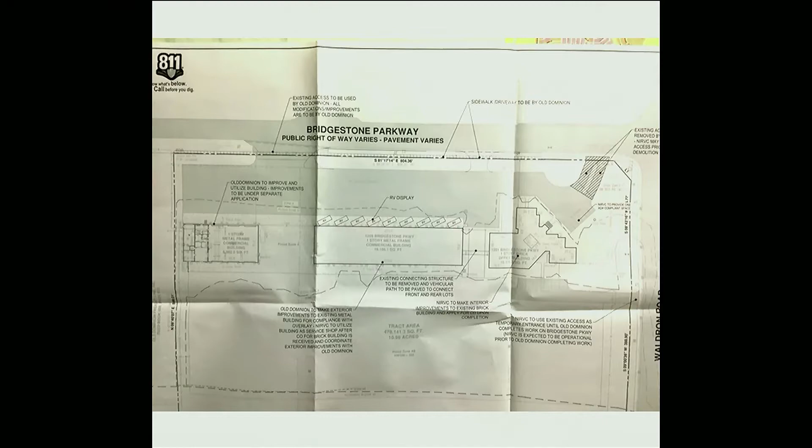have been addressed over the last 2 months, and the last remaining items were the architectural overlay requirements, because this is in the architectural overlay district for Waldron Road, covering the entire parcel. Last I heard from the applicant, they're letting the Old Dominion site plan essentially be in charge of changing the building and adding materials to make it compliant with the overlay. So this isn't a traditional submittal where you'd have 2 different applicants with 2 different material boards and 2 different color elevations. It's just whatever Old Dominion chooses that will be used for all 3 buildings on the site.

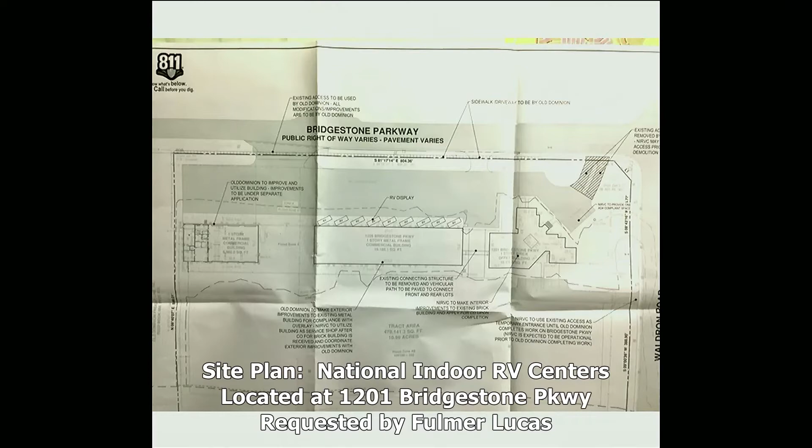Other than that, there were no outstanding technical items. We've covered the sidewalk in the past 2 months as well, and that sidewalk currently wraps the corner, but Old Dominion will be installing it all the way down Bridgestone for the entire frontage. Of course, the corner will be closed off, as you'll see here and later in the meeting. This access nearest to the corner of Waldron and Bridgestone is being closed off. Unless Mr. Leach has anything, I don't have anything else. That completes the report.

Thank you, Mr. Logan. Do we have any questions or comments from the board? Mr. Chairman, I do, just a question for staff.

The drawing we're looking at for National Indoor shows Fulmer Lucas, and the Old Dominion drawing is from another engineer, TTL. There are some minor differences. Is that something you can handle yourself? Yeah, they are different engineers that prepared it, so there are just some minor differences that'll be sorted out whenever they actually go through construction.

Thank you, sir. Any other questions or comments? Yes, I had one question regarding the entrance on Bridgestone Parkway - I think it was discussed as to whether that would be widened or not. I don't see the width here. On the Old Dominion submittal that you'll look at next, it shows being widened to 40 feet, which is what Alderman Coates had requested. Okay, perfect, thank you.

Any other questions? Mr. Chairman, I'll make a motion to accept as submitted. We have a motion to accept as submitted by Alderman Coates, seconded by Mayor Cole. All in favor say aye. Aye. All opposed? Motion passes.

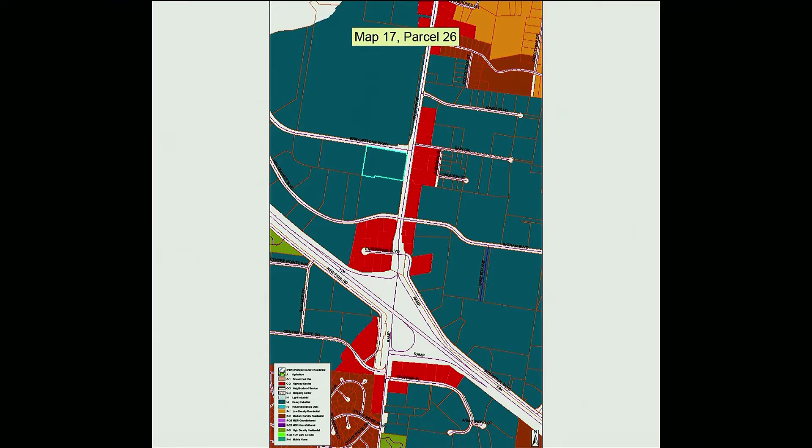You can see on the zoning map it's I-2, and really this whole area is I-2. And here's the latest plan for Old Dominion.

It covers both sides. This is the north side. So the shop is here, and they are adding a little under 3,000 square feet to this shop, and that's shown on the plans.

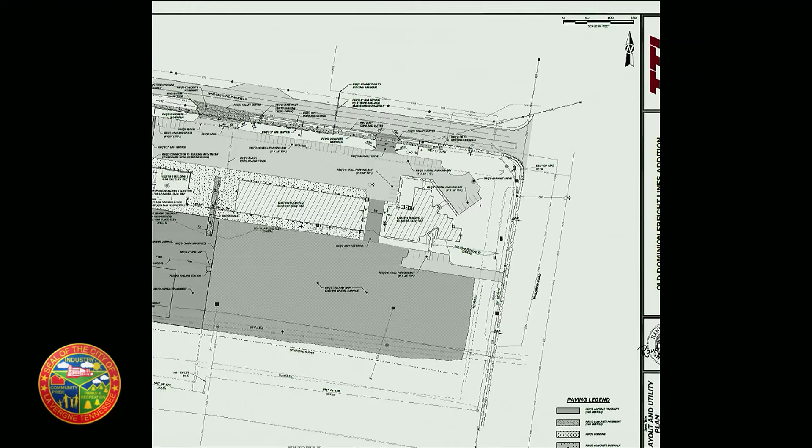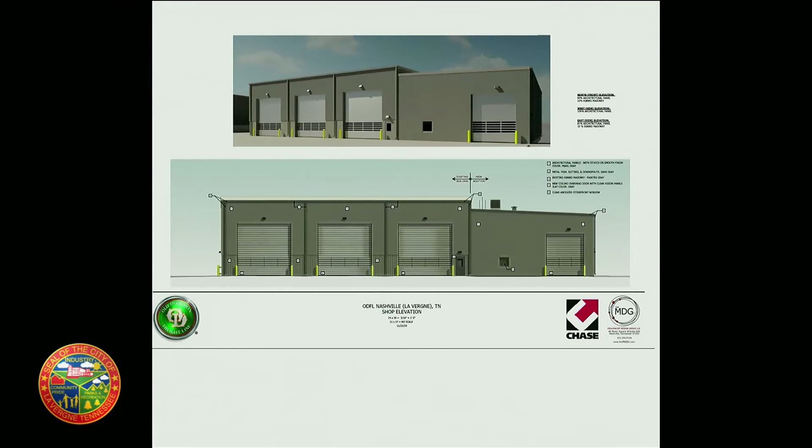And then the exterior elevations, you saw these at the workshop, and I couldn't see anything that has changed since the workshop for the exterior. They're proposing architectural panels to cover the building and the addition, covering the shop and the addition to the shop. And for the larger building, also known as the middle building, the same architectural panels on the outside.

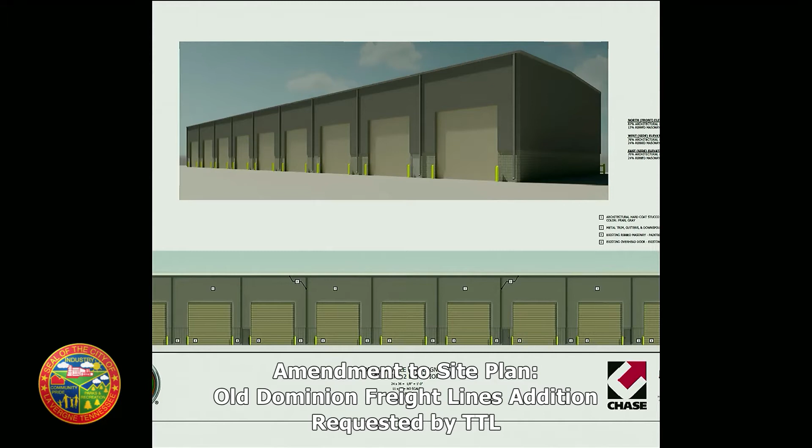They'll also be making some changes to the doors as well. These are also in your packet. They submitted full-size color elevations, which are in each packet, so you can see those up close.

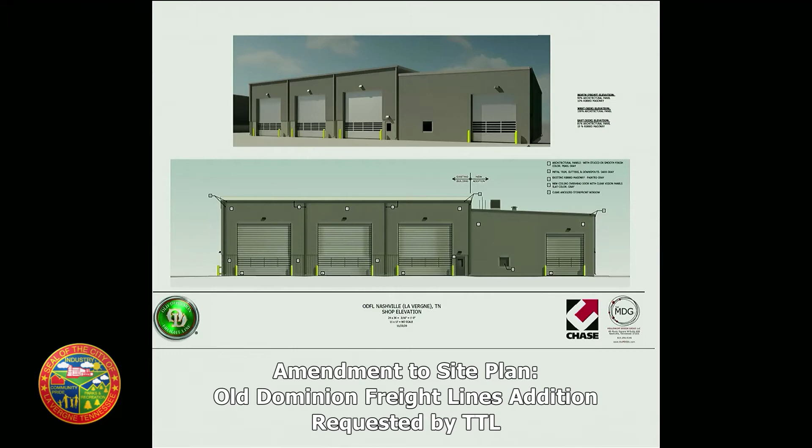They had a few items for Mr. Leach, but everything with planning had been taken care of, so I'll let Mr. Leach speak to those items. Thanks. Thank you, Mr. Logan. Mr. Leach, sir? All items have been corrected. There shouldn't be any in your list.

Any questions or comments from the board? Chairman, I just have one for staff again. With the addition to the building, it's taken over the 5,000 square feet. Is that a firewall that's going to be put in between the 2 buildings? They intend to sprinkle it, so the question of the firewall will actually come at the time of their building permit. My assumption would be, given that it is sprinkled and it's an industrial building, that it wouldn't necessarily have to have a firewall, since that's typically for a residential type structure.

Thank you, Mr. Chairman, I'll make a motion to accept as submitted. We have a motion to accept as submitted by Alderman Coates. We have a second by Mayor Cole. All in favor say aye. Aye. All opposed? Motion passes.

Next item. Site plan, DNA partnership, requested by Huddleston Steel, proposed parking lot on 2.03 acres, property located on Sand Hill Road, tax map 14, parcel 67.05, I-2 Light Industrial Zoning District, property owned by DNA Partnership LLC.

Mr. Logan. Thank you. So this is the site plan for Sand Hill Road. It's a 2-acre site on the south side of Sand Hill Road, and you can see it here in the image. The goal of this submittal is to make this a parking area, and there's no other buildings or structures planned at this time.

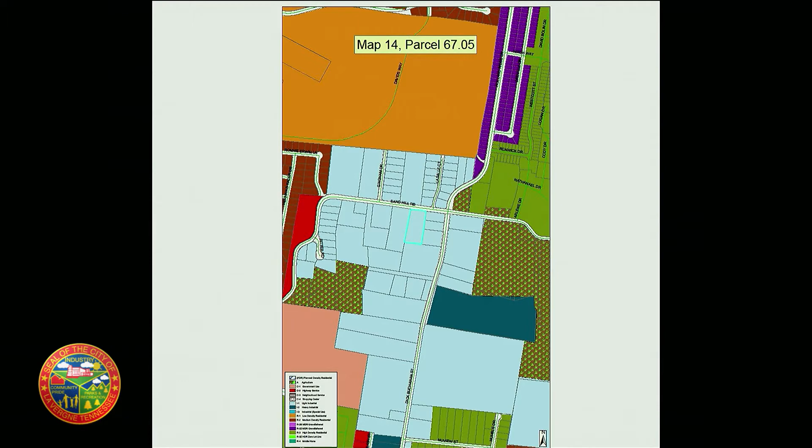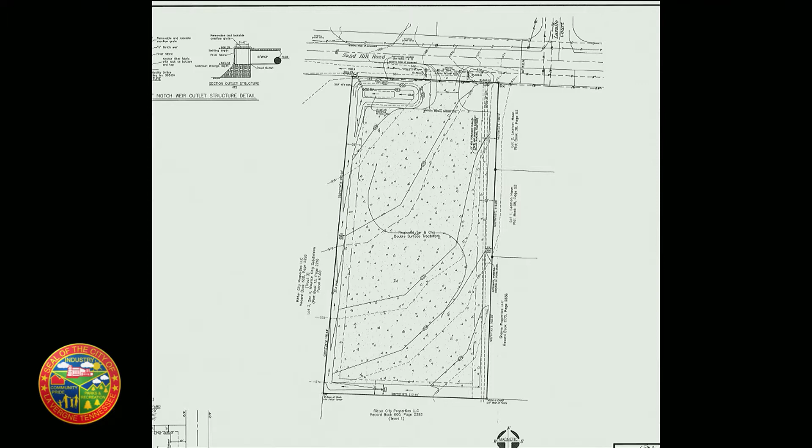But for this item, last month the entrance was discussed, and they had a 30-foot wide entrance, and then you can see in the new plan on the screen it's now a 40-foot wide entrance. They've also added a landscape plan, which was one of the comments from the workshop. So you'll see in your packet they've submitted the landscape plan, and the planting schedule is also shown right here, the plant materials schedule.

The applicant called me last Monday before Christmas, and we had a discussion about the dustless surface. They were asking about gravel, and I advised them that gravel would not be accepted by the city, so they've changed the plan to show all dustless surfaces.

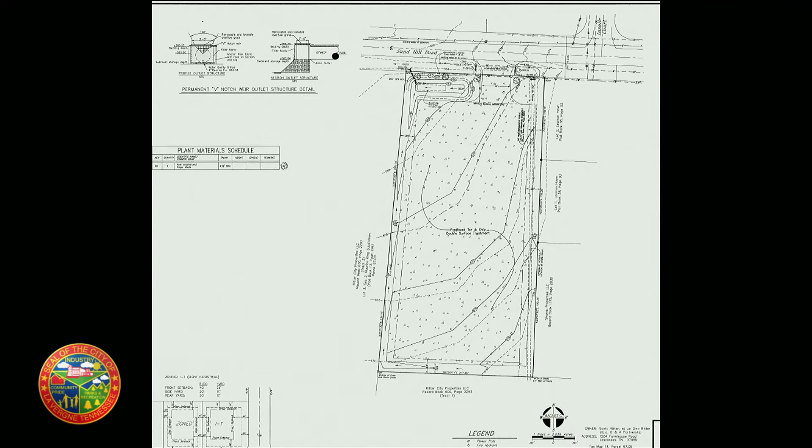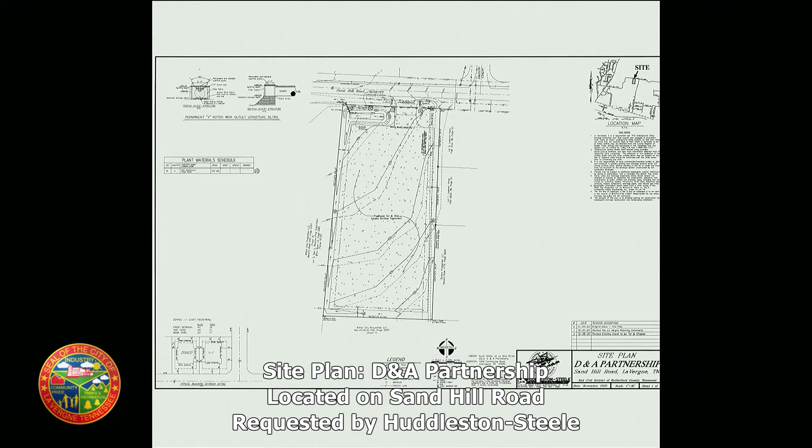The other note in the report, which I think I made in bold, is that they did add note number 7 to the site plan, saying they agree to pay the city $9,500 as the fee in lieu for sidewalks. I'm not sure how that was worked out, but that's what they added to the plan. I don't know if the board, that's part of your normal voting, so you can vote on that or vote to deny it, whichever y'all want to do. But I'll let Mr. Leach speak to that if he would like.

So if anybody has any questions, we'll be happy to answer those. Thank you, Mr. Logan. Mr. Leach, would you like to touch on the fee in lieu of sidewalks?

So with this being an industrial site, there's some provisions in the subdivision regulations regarding that. As to the requirement, sometimes we've required sidewalks to be put in, sometimes we've done fee in lieu. We've discussed that 5 or 6 different ways. The applicant requested that they be allowed to do the fee in lieu. I told them how to calculate it, they calculated it and put it in the notes. Basically, their request is to do the fee in lieu.

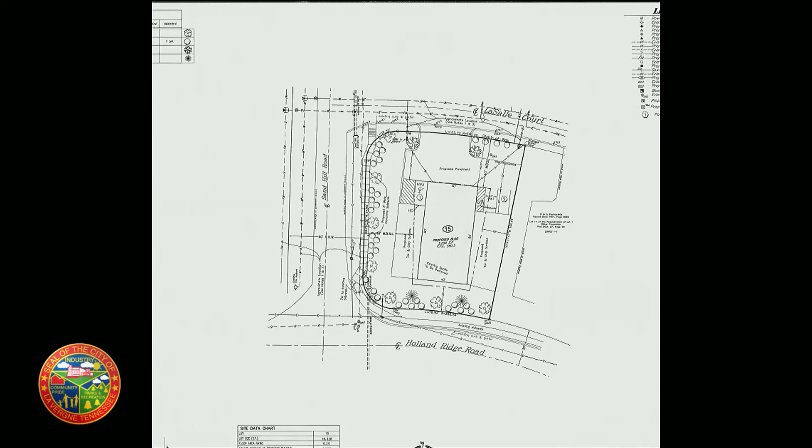It wraps around at the corner of LaSalle and Sand Hill, and they've changed that since the workshop, so that's been added. They've also added the landscape requirements, the landscape plan, since the workshop, and some site photos. This is how it looks this month.

LaSalle is a basic curb and gutter street, and it's had a lot of development in the last 3 or 4 years. We've been out there several times as each project gets completed. This warehouse that they're proposing will be about 3,200 square feet.

The site is a little over 16,000 square feet, 16,328. This is a one-story building, similar to all the others along LaSalle. They are proposing all dustless surfaces, and some areas of tar and chip will be located next to the new building, on the north and south sides.

We've already covered the sidewalks, and there weren't any other outstanding comments, so that completes the report. Thank you, Mr. Logan. Do we have any questions or comments in regards to this item?

Motion for approval as submitted. We have a motion for approval, second by Mayor Cole. Motion by Mr. Holliday. All in favor, say aye. All opposed? Motion passes. Thank you, sorry about that.

Next item, item number 6. Final plat, Old Dominion Freight Line, requested by TTL, boundary adjustment for 2 existing lots on 22.95 acres. Property located at 1201 and 1205 Bridgestone Parkway, tax map 17, parcel 26 and 28, I-2 Heavy Industrial Zoning District, property owned by Old Dominion Freight Line, Inc. Mr. Logan.

This is a final plat request for approval, and it's fairly minor. With the site plan that Old Dominion had submitted over the last 2 months, they had a setback issue, so this allows them to come into compliance with the setbacks in the zoning ordinance. They're moving the existing boundary between the 2 lots 7 feet, so not very far. Again, it's just to make them compliant with all their setbacks.